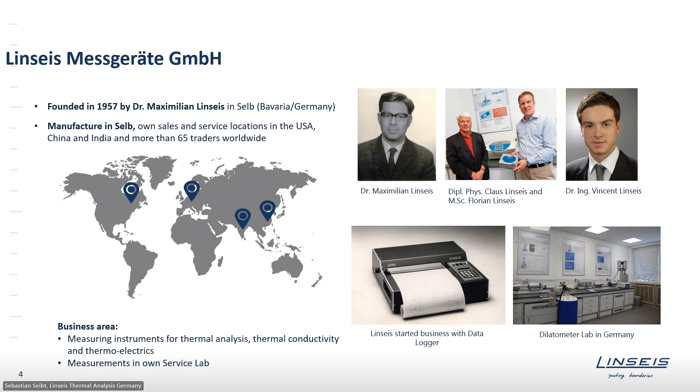Of course, there's the known laser flash technique. We have heat flow meters. However, we also have other techniques like periodic laser heating, thin layer and thin film techniques. We have the so-called transient hot bridge device. We have TIM testers. So there are many ways to determine thermal conductivity depending on sample shape and range of thermal conductivity values of the sample, and also depending on the temperature range.

We have analyzers for thermoelectrics for determination of Seebeck coefficient, Hall coefficient, electrical resistivity and conductivity, of course. And all this can also be done at thin layers, at coatings, at complete units like batteries, like little platines, stuff like that.

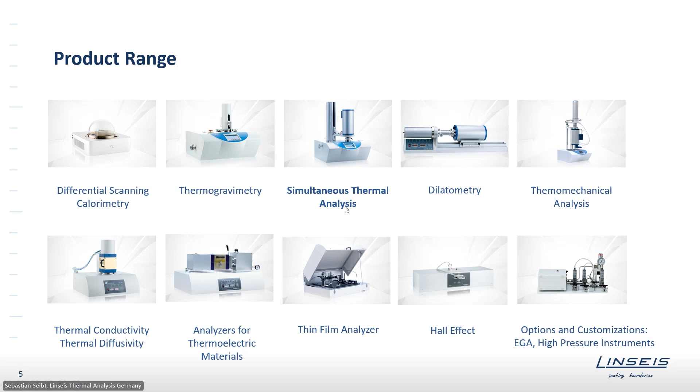Now back to today's topic. Our today's webinar is about the new design of the simultaneous thermal analyzer, the so-called STA. Before I get to the new features, I will show you a brief introduction of the STA. I know that the webinar was held this year already, so you should be aware what a TG-DSC does. If not, I will just explain it.

So you have in the lower part all the electronics, and then there is a housing containing our compensational balance, our thermal balance, which consists of a beamline balance with a counterweight and a sample holder position. You have an electric magnet that more or less can move this beam, and you have position markers that monitor the exact position of the beam of the balance.

Once these position markers notice a movement, this magnet will automatically compensate the movement in the one or other direction by increasing or lowering the voltage of the magnetic coil. And out of the voltage increase or decrease of the magnet, you get your direct readout of weight change.

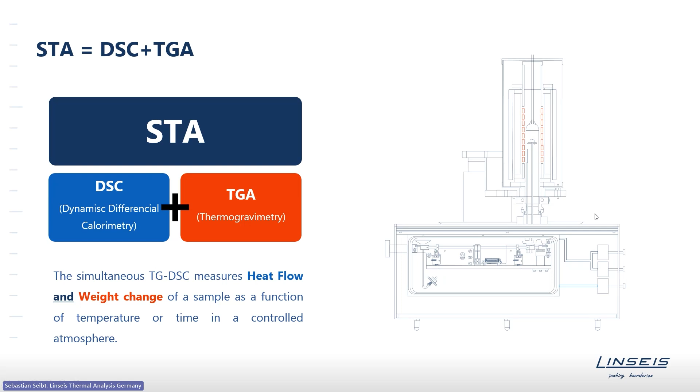So the orange parts are the heating elements, usually resistance heaters, so usually they're SiC, MoSi, whatever, and that can be also selected by the customer. They surround this reaction chamber here, and out of this complete setup, you can cover a complete or broad temperature range, and you get your information about mass change and caloric effects over the complete range. So that's the setup on a scheme, and hopefully you understood what I just explained.

Going more into detail, our design is a vertical standing design, as you just saw. That means if the furnace opens up, we put the rod from the top side into the setup. It's a plug and play design, so you put your sensor rod in here from the top, so you have a vertical standing balance. That's the design we choose and we mainly manufacture.

If you have a look on the market at the competitors and so on, you will see that there's a horizontal system available, there's a vertical hanging system available, and there's a vertical standing system available. The reason why we do this is it's the most easy sample handling and the most easy sensor exchange you can imagine.

It's a little bit more complex setup, but it's the most customer-friendly design. That's why most people build a thermal balance in a way like this. For a TG-only system, the vertical hanging version is a good choice, because in the hanging balance you have the best and most stable TG signal you can get, as the gravity pulls the system into the exact best position all the time, and you do not have to fix the position of your sensor electronically or by your software.

As said, in the hanging setup, the gravity is an advantage. In the standing setup, you have to fix this by software, by electronics, which is a little bit more complex. And that's the reason why the pure TG signal in the hanging setup can be a little bit better. However, if it comes to TG-DSC or DSC signal, a hanging system is more complex and it has a quite dangerous gas flow path, because you can get a little bit more convection here. That's why we usually design it standing for TG-DSC anyways.

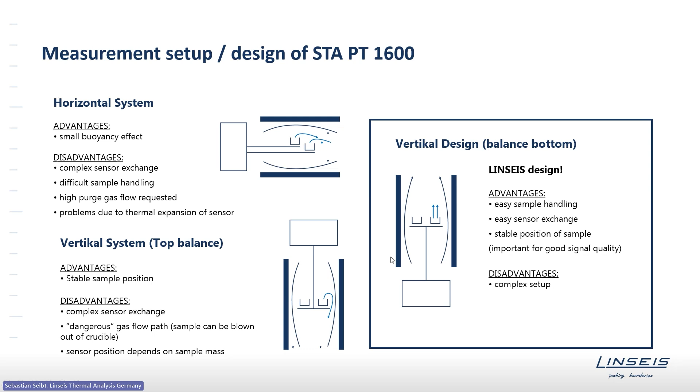However, it's a very complex setup. It's a very complex handling. You need 2 rods. You need at least 2 connections to the balance. You need a high purge gas flow. And the sensor also sees some thermal expansion, which changes the angles, and which is also quite complex to set up. That's why almost nobody uses the horizontal system anymore. We did this in the past as well, but just about the geometry, that's why we use a vertical standing design.

Now, coming to our complete STA range. With our STA program, we cover a temperature range from -196 centigrades, so from liquid nitrogen temperature, up to 2400 centigrades, which is a graphite or tungsten furnace range. We have a so-called STA PT1000. It's a smaller device which has an integrated furnace that cannot be exchanged. It's a fixed furnace. For the lower temperature range, it's the easy approach. Then we have the so-called basic unit, the STA PT1600 series, which is the most flexible, most modular setup.

Here you can have any furnace attached to the system, from liquid nitrogen temperature up to 2400. You can equip it with multiple gas controls. You can equip it with overpressure, with vacuum controllers, whatever. So this is the basic unit we are usually using.

Besides that, we have special devices like the magnetic suspension balance, like high pressure versions. The magnetic suspension balance is a balance where you have a completely separated sample chamber. It's coupled to a balance by a magnetic levitating part. So you have a magnetic coupling that separates the furnace and the sample chamber completely physically from the environment, from the balance unit. So it's made for very critical conditions, for corrosive gases, for some critical atmospheres, like fluorine, like chlorine gas, or stuff like that.

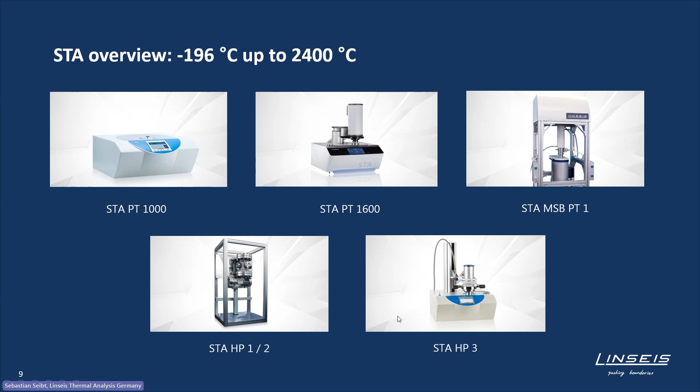And then we have a smaller pressure version that goes up to 150 bars. It's a tabletop instrument. It's a modification of the STA PT1600 that has a furnace, as said, up to 150 bars, up to 1000 degrees. So we are limited by temperature here. And this one is the tabletop version of our pressure balance, and it's also usually custom designed and not off the shelf. So that's the range. And as said, today's topic is more or less focusing on the new PT1600 platform.

Regarding the hardware options of our STA PT1600 series, there are multiple options you can select. As I just mentioned, we can modify it to a certain degree. We have the option for a sample robot. We have, of course, vacuum options, including turbomolecular pumps reaching vacuum levels up to 10^-6 millibars. You can add water vapor generators for controlled humidity, controlled water vapor atmospheres. We have completely free design gas dosing systems, so you can add as many gases, controlled by mass flow controllers, as you want. From inert to oxidizing reactive atmosphere, anything is possible.

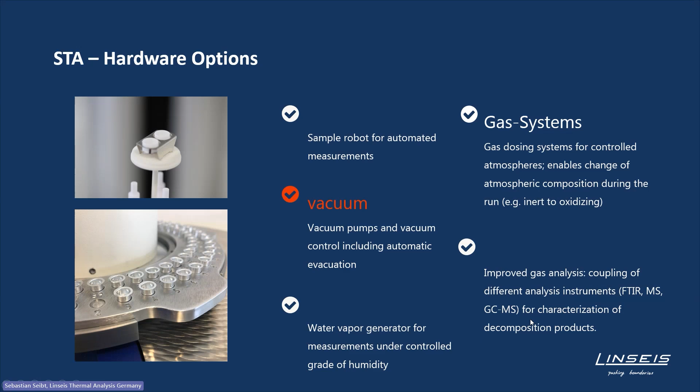And we can couple the instrument to evolved gas analysis, which means we can couple FTIR, MS, and GC-MS directly to the system, where we can analyze the outgassing and whatever comes off of your sample. Further options is the furnace program here. As you see, as I mentioned, we can cover a complete range, but not in one run. That's what I have to mention.

We have furnaces from liquid nitrogen temperatures up to 2400. It's written -150 here instead of liquid nitrogen temperature, which is -196. The reason is down to -150 centigrade, we can control the furnace properly. If you want to go lower than that, you just have to manually open the cooling and make full liquid nitrogen cooling, and then start heating at -196, but you cannot do controlled cooling down there, just because this question sometimes pops up. And as said, we have liquid nitrogen cooled furnaces for the low temperature range, and then from ambient temperature, we can go up to 2400.

The design of the furnace, the used heaters, and also the used thermocouples for the desired temperature range define what atmospheres you can use. To make it short, up to 1600 centigrade, you can use almost any atmosphere. If you want to go higher than 1600, it gets more complex, and at a certain point, at roughly 2000 centigrade, it's only possible to use inert or reducing atmospheres, but nothing else anymore. So oxygen or air is limited at roughly 1800 to 2000 centigrade with our furnace program. Higher than that, you can only operate in inert or reducing environment, depending on the furnace type. So that's the furnace program.

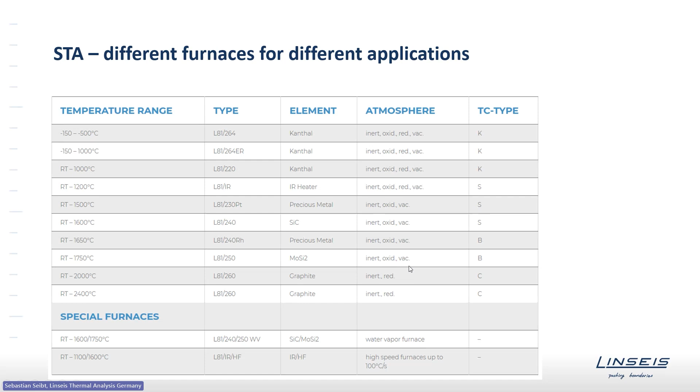And as said, we have water vapor furnaces, and we also have some special furnaces like infrared furnace heaters or light furnace heaters, which are also customized and available on demand.

Regarding the sensor heads themselves, our STA is also quite flexible. For the TG-DSC, for the combination, we have the classic DSC heat flux sensor, which is the classic TG-DSC sensor, with two crucibles. One is the reference, one is the sample crucible. Usually the reference is empty. In the sample crucible, you put your sample, and then the system measures the temperature on both sides and automatically reads out the temperature difference as a thermal voltage, which is your signal for the DSC,

and it measures the mass change. Besides that, we have a little bit bigger sensors, the so-called 3D Calvet type DSC sensors, which allow the use of bigger volumes. They also consist of 2 crucibles, however, not in this metal frame, but with multiple thermocouples that are put in a row at each side, at each crucible, to integrate the volume of the crucible properly and to measure DSC

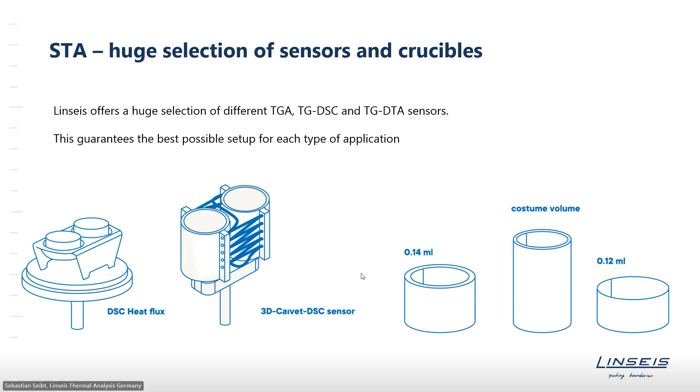of bigger volumes. The typical DSC crucible is 0.14, 0.12 milliliters volume and consists of alumina or any metal like platinum, gold, stainless steel, something inert usually. And for the bigger 3D Calvet type sensor, we can use custom volumes up to roughly 0.7 milliliters. If you use the system in a TG only mode or also DTA mode, there are also DTA sensors.

With the DTA sensors, there's also our new so-called 3-port sensor, which is a multiple thermocouple sensor, which is a higher resolution DTA. The difference between DTA and DSC is that the DTA allows bigger volume, but it does not allow you to quantify the amount of heat flow. So you can still see if something is exothermic or endothermic. You can determine when it happens, but you cannot determine the amount of energy that's released or consumed anymore. So the DTA is a qualitative but not quantitative DSC technique.

It's the older version of DSC, but for some critical substances that are quite reactive, that would damage the sensor, or substances where you need more volume, the DTA is sometimes the better choice. And here, as I said, you're more flexible regarding crucible dimensions, and the crucibles can also be made of any kind of material. And besides that, you have the TG only mode.

That means you can operate the system in TG only mode as well, where you have a TG sensor that ends up in a flat rod or in a rod with a little pin. Personally, I would prefer the pinned one. And here you put one of these crucibles on top, and then you just measure one temperature at the bottom of the crucible, which is the temperature of the sample usually, and only the mass change.

If you do that, you can use sample volumes up to 12 milliliters, so you can really measure a large amount of sample, which is useful if you have very inhomogeneous material where only a very tiny amount of sample will react, or you expect just a tiny amount of sample to be reacting. And to monitor that properly, you can use very big volumes here.

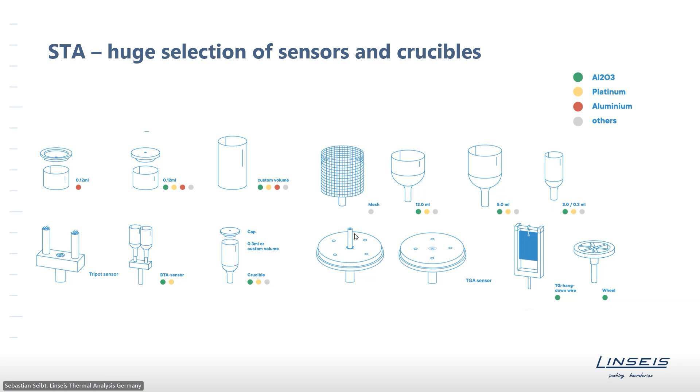And besides that, we have special crucibles available as well, like a system where you can hang something on a little wire if you want to put a foil in a gas flow, for instance, or you can have a mesh type crucible for better gas throughput. That brings me to the next topic. There's also one of our latest developments, our new forced flow design option.

This new patented technology allows us to put the gas flow path directly through the pins of the capillaries and through the sample coming from the bottom of the crucible. So the gas comes through the pin where the crucible is mounted and flows directly through the sample. That means you have more precise control of your reaction. You can monitor slow reaction rates and control your reaction rate properly.

You can mix your gases and your sample in a better and more ideal way. You have real-time monitoring. You have easy adaptation to your reactions. In a typical standard design, the gas is released in the environment next to the sample using a separate capillary. And sometimes the sample gas is not passing the sample or the crucible in a way that the reaction can

be monitored properly. That's why we developed this new design where the gas flows directly through the crucible and directly through the pin. Of course, the gas flow you can use is lower than if you just release it next to the system. However, you have more proper control and you get a better reaction rate and a better understanding of your reaction rate.

The drawing over here shows the gas path. So instead of a gas inlet at the side through MFC that goes into a capillary that's released next to the system, there is a split that directly goes through the system, is attached to the beam of the balance to not affect the mass change. So there is also a special design for the gas path to not affect the mass readout.

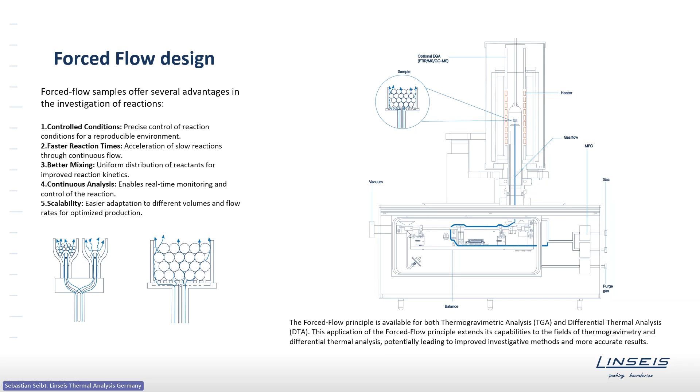And then it goes into the sensor and it goes within the sensor into the system directly into the crucible, which is a quite unique design and was a quite tricky development, but meanwhile it works quite well. So that's our latest and quite interesting option. This also shows a curve and a comparison to show you what's the difference.

To understand this measurement, I have to explain. So you have a blue and an orange curve here that show the mass increase of a copper sample that was seeing oxygen. The brown signal is the oxygen, so the oxygen valve was opened here, then there was oxygen flow for a couple of minutes, and then the oxygen valve was closed. At that point, you see both curves, blue and orange one, show mass increase.

The orange one shows a little bit faster mass increase than the blue one, and the reason is the orange one shows the forced flow technique. So here the oxygen directly was put through the crucible, while in the blue one, the standard default design was used where the oxygen was released next to the sample containing crucible. So you see the reaction rate of the orange one is faster, and there's a faster response, and the sample is reacting much faster and more completely than if you release the gas next to it.

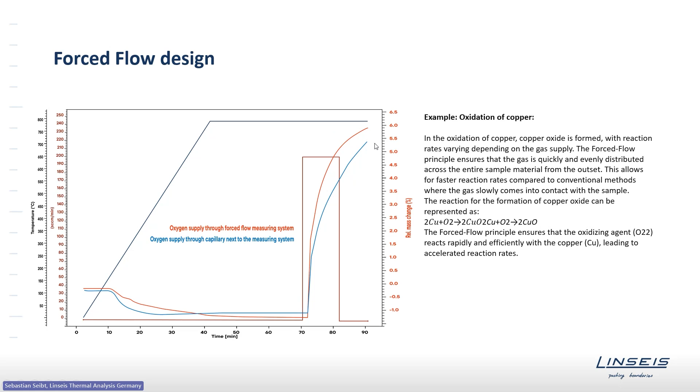So that's just a test we did to show that the system really has a huge influence on the reaction rate and the reaction control of any sample. The blue line here, just by the way, shows the temperature. So we heated up to 750 degrees and then kept it constant for the experiment. But anyways, as said, this is the oxidation of copper samples, and that was just done to prove that our system is working.

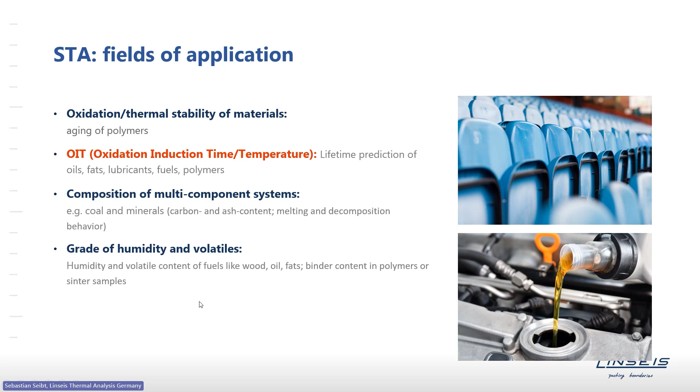Some further applications of STA besides this flow-through setup would be thermostability of materials like oxidation tests, oxidation induction time tests, which any DSC could do. You typically investigate composition of multi-component systems. You do tests for determining the grade of humidity, determine the amount of volatiles, the ash content, stuff like that.

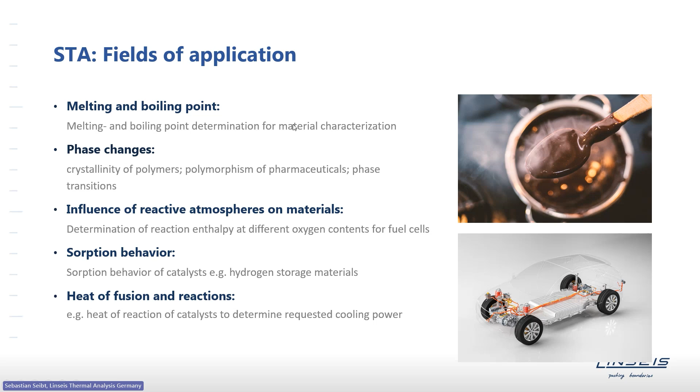Furthermore, you can do melting and boiling point determination. You can investigate phase changes, anything a DSC can do. You usually look at reactive atmospheres with TGA or STA. Sometimes you look at different atmospheres like sorption and desorption, reaction speeds, reaction rates, mass change due to reactions. That's what typically STA does. For many fields like polymers, inorganic materials, ceramics, food chemistry, pharma fields, life science, it's a quite flexible instrument at all.

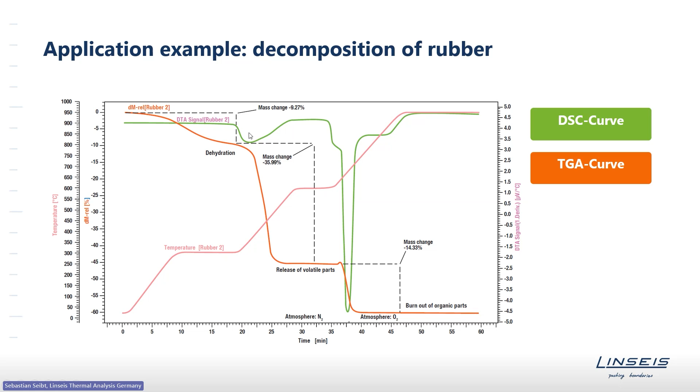So during these decomposition reactions, you see big endothermic and exothermic peaks, giving you the amount of how much carbon is created, how much carbon is burned off, how much volatiles are released. So that's what a typical experiment may look like. Just another example, it's the decomposition of calcium oxalate, which is a reference material we are usually using. That shows a 3-step thermal decomposition. First, in the first step, it loses its crystalline water.

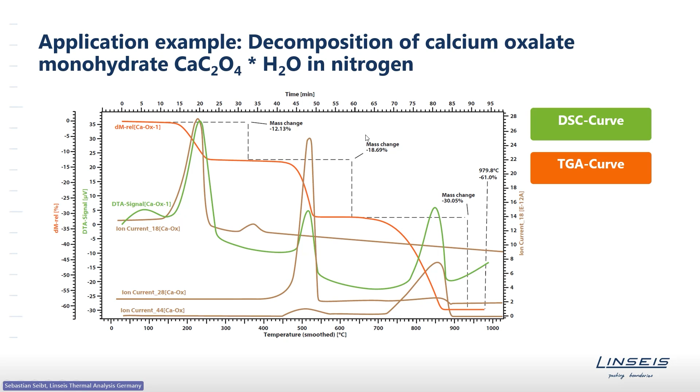Yeah, I will not so much focus on the special instruments. As I said, we have inductive heaters, we have pressurized systems, we have a special design for glove boxes and hot cells where we can separate the electronics completely from the instrument. And for all these special configurations, there are also special applications, and also a lot of customization possible. As said, we can separate electronics. We can use inductive heaters or light furnace in case a resistance furnace is too slow or has too slow cooling times, stuff like that. And we can do many options. But as I said, I will not focus on the special options for the moment.

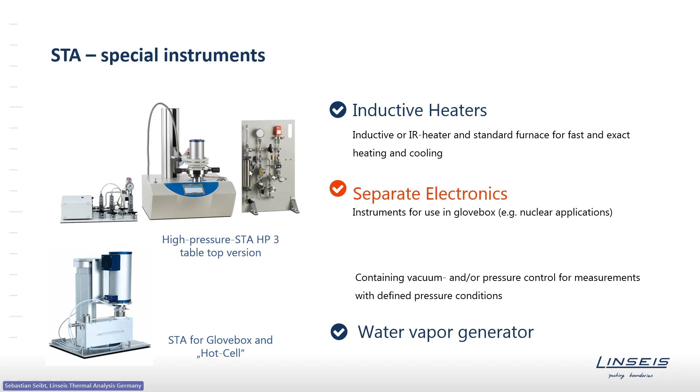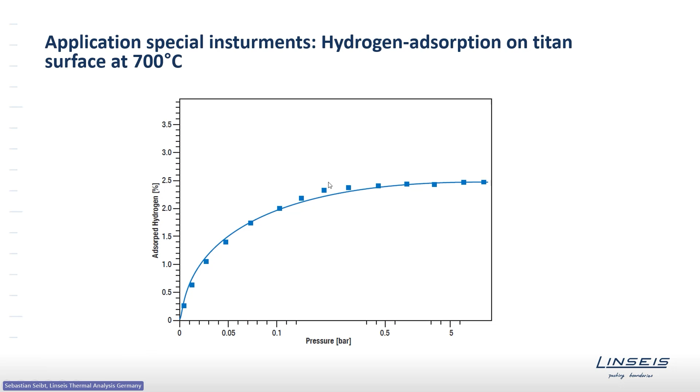The amount of hydrogen that will be sorbed by the surface will not increase anymore, even if you go up to 5 bars. And such experiments help you to find saturation levels and the maximum of possible sorbed hydrogen or any other gas on a sorbent that you can use. But as said, I will not focus that much on the special versions.

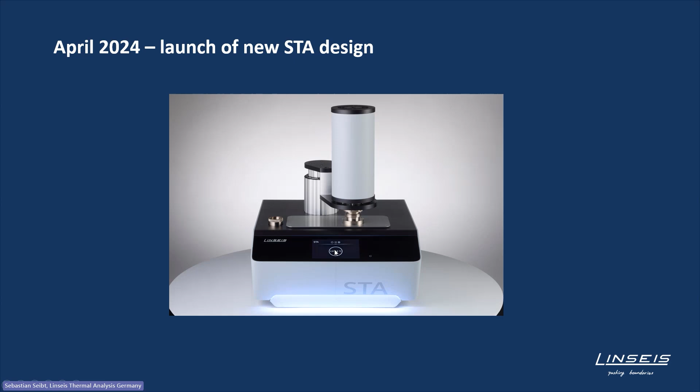I want to come back to the new design. As I mentioned before, today's topic should be more or less a repeat of the webinar we started the year with in January. In January, we promised that by April we will launch our new design, and we did so. Meanwhile, our STA PT1600 series looks like this. It's no longer the blue and white system you may know. It's now this new black design. That's, of course, not only a design and a nice new panel with some fancy LEDs. It comes also with some new features and functions.

The most obvious first, it has a completely new touch panel with much more user-friendly functions than the old one. The old one was just monitoring the active curve, and that's it. The new one can be used to really control the system a little bit more. You have a completely integrated toolkit panel, so there's integrated storage place where you can find tweezers, replacement sensors, and stuff like that. You have a much smoother and much more improved furnace lift. You will see once you have it in your fingers or you visit us at one of our exhibitions.

You have a completely new structured software package, which is the more important thing. And we have now intelligent systems. Finally, we can now say any configuration of the system will automatically be recognized by software, and you do not have to select anything by yourself. That's one of the biggest improvements, in my opinion. In detail.

Let's start with the software. We did a lot of software improvements with our new version software. We have now a Lex Bus system for plug and play, which I just mentioned. It causes direct communication within our system. That means new hardware parts like additional furnaces, different furnaces, sensors, sensor configurations, additional gas panels and stuff like that will automatically be recognized by the software. It will automatically be configured by the system, and you do not have to do it by hand anymore.

We improved our furnace and oven control, which means you have a much more precise temperature control. We improved our controllers. You have lower delays and lower overshoots in the temperature profile meanwhile, which is also a big improvement. We also completely redid our interface.

So our user interface has a new design. It's a little bit easier to use. There is a lower amount of icons, and some functions that were never used or that were not very useful and obvious to the customer were partially hidden, partially removed, which is also a nice improvement for the user.

What's also new, we can now bring in complete process security. The data is protected at all times. It's in a fail-safe manner. That means the data is always copied in a database, but also saved. In case the system fails or there is a power interruption, stuff like that, the data is safe.

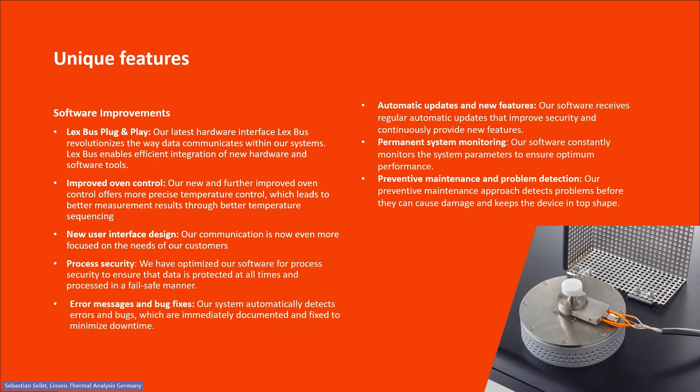We have a permanent system monitoring, which means our software automatically monitors the parameters. And if anything is not working properly, it can automatically give the user, and if we are connected, also us, a little error hint that a maintenance or service visit would be necessary. After all, that optimizes the maintenance and detects problems before they can cause damage, and in the ideal case before they occur. And that's our new software approach we have with the new system.

There's also one thing we introduced here, which we have to see how it's accepted by users. We have a Linseis direct lab link, which means if you set up an experiment and you feel unsure or you need help, you can directly access a chat function with our experts here in-house during the experiment. If you're sitting in front of the instrument, you can use the online chat function directly and get in touch with us, so we can help you and guide you through the process. That's quite comfortable for the user. We have to see how they accept it and how fast we can respond here.

We also modified the electronics. We optimized our baseline width. We optimized our accuracy and also reproducibility by a new digital electronic that is state of the art and is, of course, also a little step forward.

And finally, we have some hardware features. We improved the design. You already saw it. It looks much more worthy than the old one. It has some new features, a new touch panel, and we have a lot of new hardware features like the tri-couple high-resolution DTA setup, and completely jacketed sensors. We did not have them in the past. Now we have complete jacketed DTA sensors for very corrosive atmospheres, and we have the new patented forced flow method that I just introduced to you. So that's what we did hardware-wise.

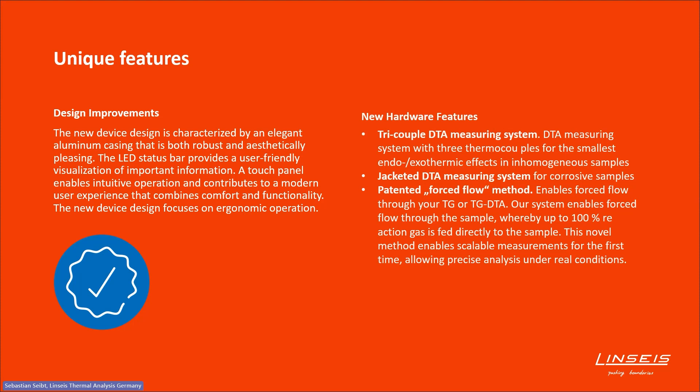So these are the basic new features of our new instrument. And that's also the end of this presentation here. As said, it's more or less a repeat of the STA introduction at the beginning of the year. And now as we have meanwhile successfully launched the new design to the market, we can also present the new features.